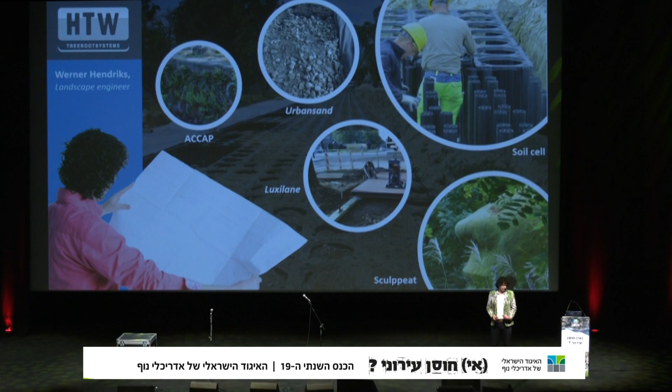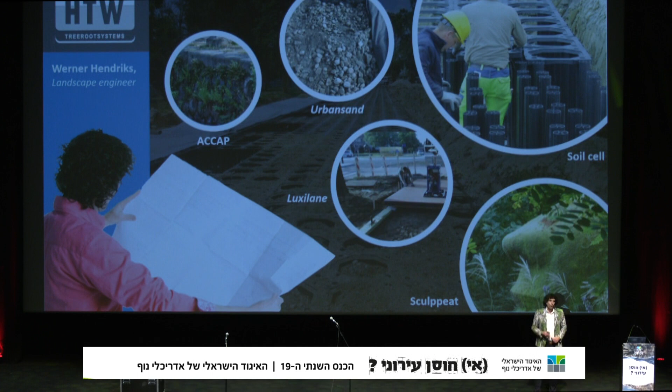First of all, for the people who don't know me, I'm Werner Hendriks from the Netherlands, and I was a former landscape architect, but I was ashamed of our profession. We made beautiful drawings with really big trees, and after 10 years, those trees were not growing, dying off. So as landscape architects, and I think there are lots of landscape architects here, we should be the ones who are responsible that the contractor is doing a good job, and planting big trees means you need lots of soil underneath the tree.

So I went back to the university and studied tree engineering, green engineering, only underneath the soil. So I'm not an expert in trees, I'm an expert in soil conditions. These are some of the products that in the meantime I developed: urban granulate structural soil, Luxilane, a floating bicycle lane, because in Holland we have lots of bicycle lanes. We have several soil cell systems, also here in the exhibition, so take a look at that.

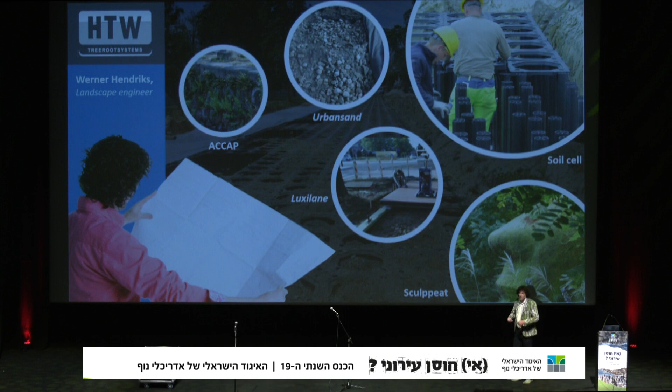But also, for the quay walls in Amsterdam, we are growing spontaneous plants on newly made walls. And it's exactly the same as we do for trees. It's all about how we can grow roots everywhere. So also on new walls we can grow plants. So my profession is much more than only trees. Okay, this is the presentation. We already had some issues about climate change, and we know climate change is coming, so I'll go through the next steps quite fast, because the time is limited, I heard.

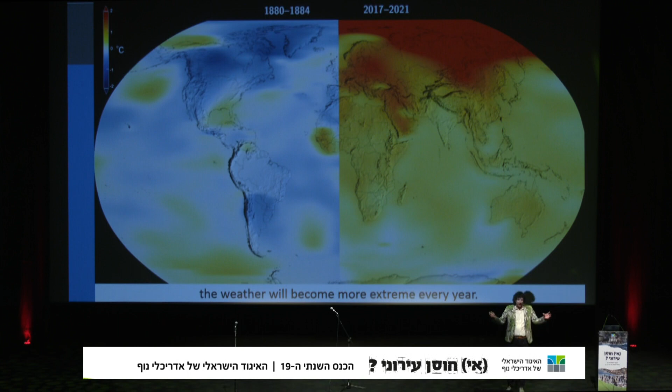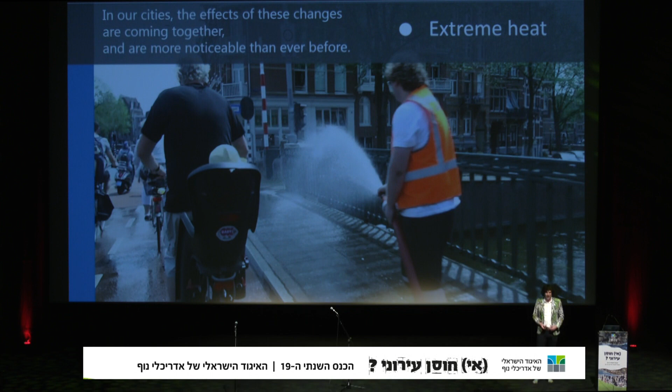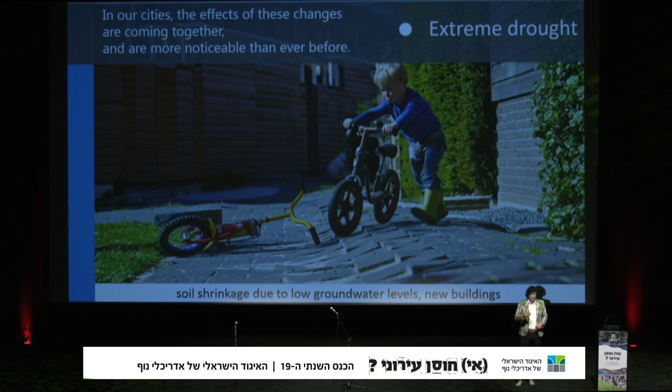Also flooding, of course, and soil shrinkage. You maybe don't have this problem, but in our country, the sea level is rising and the soil is sinking, so within several decades, we have a much bigger problem. So climate change is really affecting every one of us, not only us in Holland, but also you everywhere. What I show you in red are the things about climate change and about trees. So we have to look at how we can incorporate better solutions for the cities.

And of course, my field of work is normally Europe. But the things that happen in Europe, the physics of tree planting and stormwater management, are exactly the same in Israel as in Holland. Only the conditions are a little bit different.

So I want to tell you about the next generation of solution. The last time I was here, I was talking about tree planting solutions, only one function. But now we need to go further, one step ahead. So last time I spoke about grey concrete, that we should have more trees. And in Israel, it's probably even better that we have more trees because we need more shade.

But all the design is made because we need cars in the city. In Holland, we call the car the king of the city. But the king of the city should be us, people. Drainage. In Holland, we are really, really good in draining water away, directly to the sea. And because of that, we now have major problems. So we have to find a way to let the water infiltrate inside the city. And that's probably exactly the same that you have.

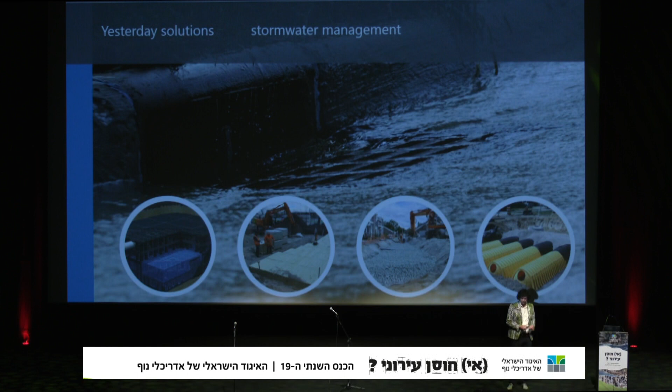The rain gardens or swales, I saw it already in some presentations here. It's a depression in the area where you can capture water. Of course, this is very nice if you have a new surrounding, a new village that you're building. But in the old city, there is no place for such a big open area. So we need some other stuff. So we have the infiltration crates, the second picture. It's just plastic or concrete or steel structures underneath where you can store water directly. But it's only one function, storing water.

We have gravel, just rocks that have similar sizes, so there are lots of pores between the rocks, so you can store water. It's a cheaper way, but of course in the crates you can have about 95% of water, and in the rock you can only have 30% of water. So you need much more room, and again, in an old city you don't have so much room. There are utilities everywhere, so we need to work around.

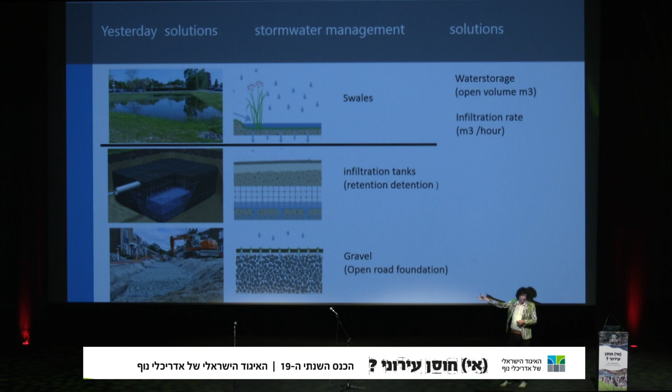All those solutions have one problem. If we let runoff water get in, pollution is floating with the runoff water. So leaves, oil leaks, salt, everything is flushing with the water into those systems and directly into our environment. So there are solutions for that. We have catch basins to filter out the hard sand materials, the leaves. We have big sand filters to get the fine particles out, or carbon filters to filter the oil out of the water, so it won't get inside our groundwater reservoir anymore.

And these are some of the things I want to talk about. And we do the same for tree planting solutions. Stormwater management is instantly measurable. We can measure how many cubic meters of crates are in, so we know how much water we can store directly after one rain event. There is policy available for stormwater management and also much experience. These crates have been on the market for 20 years or longer, so we have lots of experience and research on that.

And we also know the obligations; there are laws about how much water we should store when we make a new village. For every square meter, in Holland we calculate with 100 millimeters for every rain event. So there's lots of water we need to store. So the budgets are available, and this is a really good thing. Budgets are there for stormwater management. The maintenance cost, that's the second thing. That's not an advantage, it's a disadvantage, because with stormwater management, you need some maintenance.

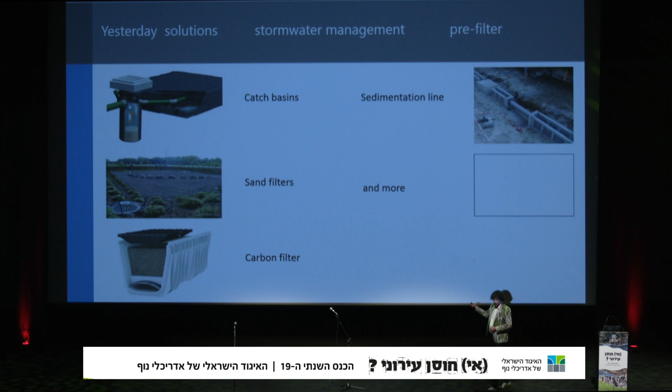Can we go back? Yes. These filters should be cleaned after a while, and this is costing us money. If we don't clean, we cannot store so much water anymore. So this is costing us money. Oh, that's too far.

And the non-visibility of maintenance, because everything is underneath the soil, underneath the pavement. Nobody can see if the contractor maintained the crates. Did he clean up? Nobody knows. And contractors, you know about contractors, it's hard to supervise them, make them aware of what they should do. And of course, we always need anti-pollution filters. So it's not only stormwater management, we also need the sand filters, the oil filters, to prevent pollution entering our groundwater.

Now we go to the tree solutions. And this is, of course, in my field of work.

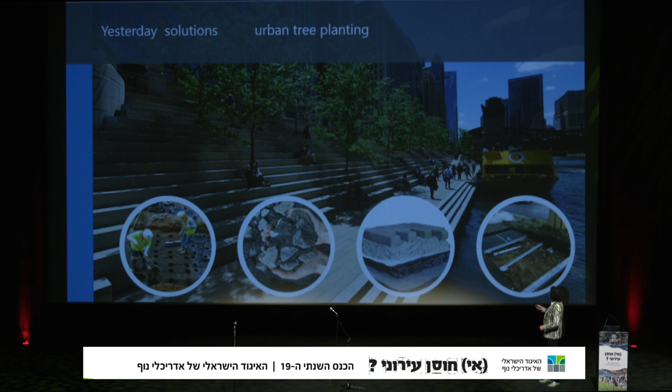Let's start with this one, structural soil. Now, after 6 years, I see several products already implemented in Jerusalem, in Tel Aviv, all around Israel. Structural soil, for the ones who don't know what structural soil is, it's similar to the rock for stormwater management. Rocks of the same size, but now in between those pores, there is some soil. And in this soil, the roots can grow. So structural soil is nothing more than a foundation for the road where roots can penetrate.

But remember, and you see it on the soil efficiency, 20%, so if you install 10 cubic meters, only 2 cubic meters of soil are available for the tree. 80% is just rock. It's not doing anything for this tree.

Now we have raft systems, sandwich constructions. They are made because in Holland we have sandy structural soil. And sandy structural soil is not equipped to have truckloads. So the raft systems are like big snow boots underneath the wheels of the truck, so the pressure on top of the soil is not that much. And the air layer, they are open crates, so air can come in, so there's more biology inside the soil. And that is, of course, better for the trees.

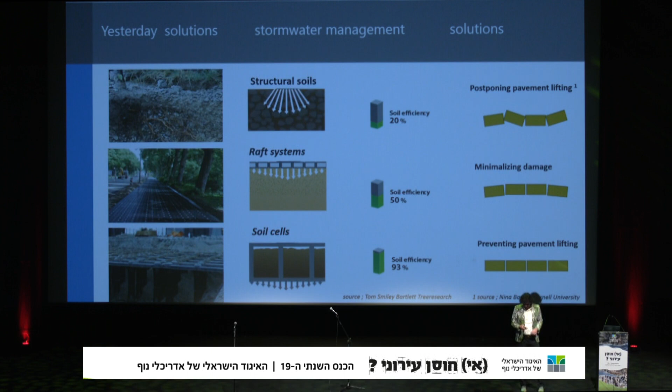And of course, when we have trees in Holland, you think, okay, in Holland, we get rain every 2 weeks. We don't have to water it. Of course, we don't have irrigation systems for every tree. But we need water bags to water the trees in the first 2 or 3 years, so they grow and get the roots out, and then they can survive. And we have different systems. And here in Israel, we use, of course, more like dripping systems or bubblers.

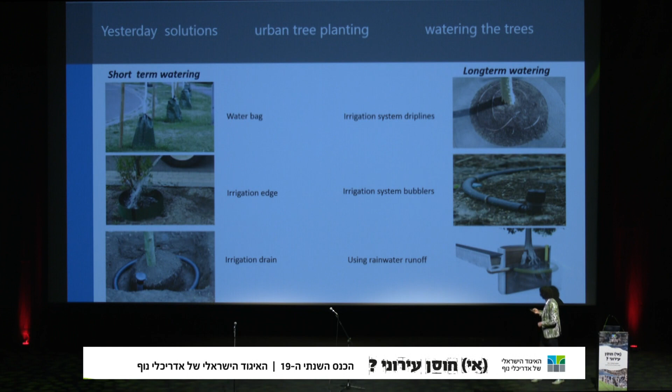And below, this is a system that we now use in Holland more and more. So rainwater is captured and just flushes into the root system. So we don't water the tree, the rain is watering the tree, because when the tree is covered with pavement, somehow the water should come in. And in this way, water can come to the trees.

And we can have systems like soil cells, structural soil, sandwich construction, but it's all about the soil. The soil is the most important thing to grow trees. And in one of the lectures before, soil is one of the biggest stormwater management systems that we have. We can store lots of water inside soil. And with a tree planting system, we have soil inside, so we can also store water inside.

But compacted soil is compacted, so the openings are pushed out by compression. And in uncompacted soil, there's much more air and water volume, so we can store more water. So it's very important that if we plant trees, the soil should be uncompacted, because then we can store more water and grow better trees.

And not only the compaction rate is important for stormwater management with trees, also the clay content and the sand content. Because you see here, in sandy soil you can store about 30% water. In clay soil, you can store mostly about 50, 60% of water. But against that, in sandy soil, you have a much higher infiltration rate. And with clay, water will not infiltrate, so it takes much longer before infiltrating.

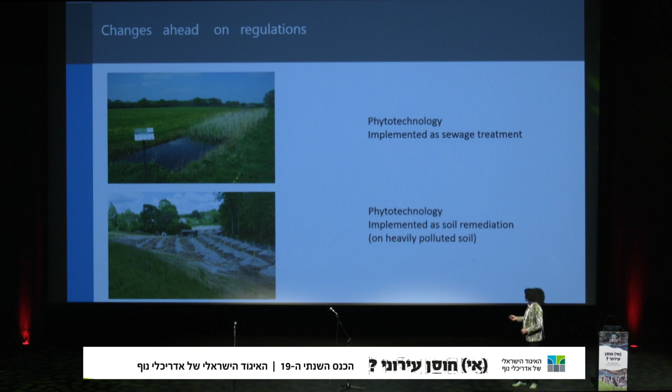Phytoremediation, in short, I don't know how much time I have. Okay, we have to hurry up, I think.

These are some of the strategies that trees have. And those strategies, we know they are working. We have research on phytoremediation and phytotechnology, but we are not implementing it with urban trees. Why? Nobody can tell me why. We know it is working, but we do not use it with trees in our cities. These trees can also have the same function as over here. So for that, we have to be open for change and open for research that has already been done in other countries, maybe also in this country, and adapt that to our city trees.

In swales, we already do it, but for another reason. In swales, we can have water inside, and we know some dust will come up and just clog the surface area. We know now, if we plant trees with it, this won't be clogged anymore. So this tree is making the soil like a sponge again.

But because this tree has this function of opening the soil again, we also do research on how much pollution it can get out. And this research we can use for our urban trees, because again, we don't have so much area in old cities to make systems like this.

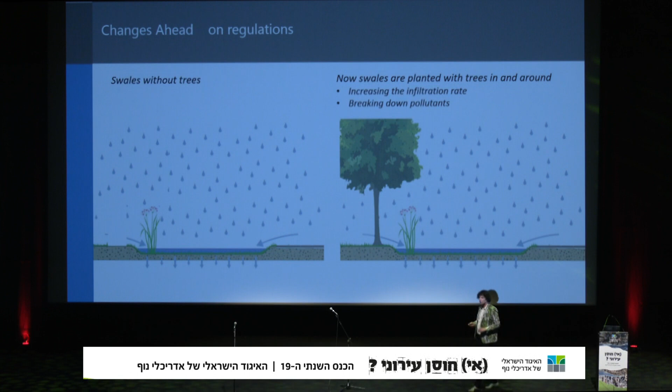And now we are going to compare the pros and cons from the stormwater management and the tree planting systems. And now you'll see something nice. When we do the next, reduce all the cons. Against every con: no regulations, there are regulations on stormwater. Low budgets, very high budgets. High maintenance cost, hardly any maintenance cost.

Non-visibility, visible. If the tree is growing, the system is working. Anti-pollution filters, extra cost. We don't need that. We have trees that will do the job. So if we can just combine those pros and leave out the cons, we can have the next step of new systems, and then we can save some money.

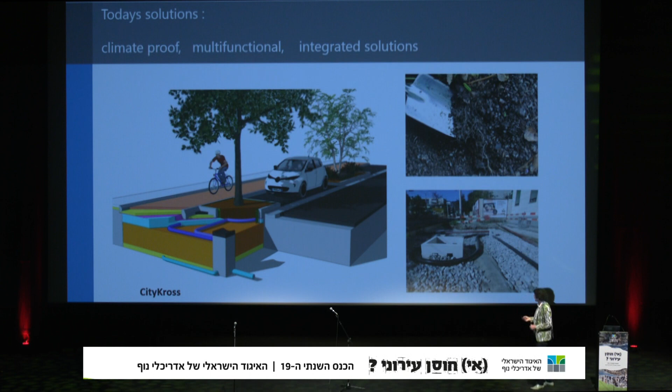And because there's lots of carbon inside structural soil, these can pick up the pollution, and only clean water can go out. So we have a Stockholm method that is good for trees, good for stormwater management, and good for filtering. But it still is structural soil. You need lots of volume, because if it's only 20% of soil inside, in this soil you can only have 30% of water, then you need lots of volume to have lots of water inside. But it's working.

The next, the sandwich construction, raft systems. It's an open area underneath the pavement for spreading the loads. But because it's open, we can also let water get in. So this line is connected to the sandwich construction, which is on top of sandy structural soil. So in this case, we can give the system an extra function.

And it is also Wageningen University in Holland who says, if we design something new in the cities, we must get rid of the one-functional applications. Every new design, every new subject in this design should have at least 3 functionalities. And this has 3 functionalities. First of all, the water inside can infiltrate in the soil. The oxygen can get in for the trees, so the soil has more oxygen. And the pavement will spread the loads, so we can have heavier trucks driving close to the trees.

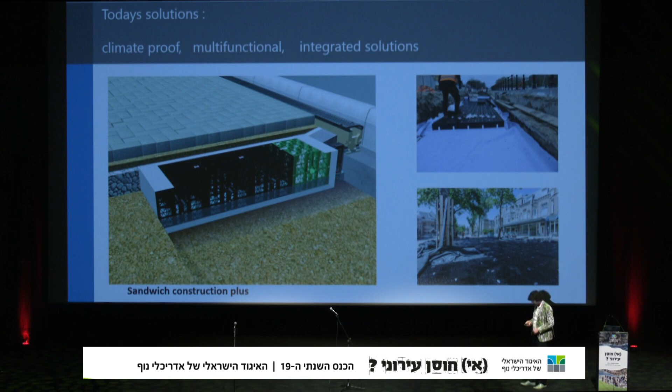Then we have the sandwich plus system with a second water table. So we can see there is a sandwich construction on top and one below. So water will infiltrate first here, go down, and here it's being captured. In Holland, we don't have any irrigation systems, and the droughts are getting longer also in Holland. When we have rain, we have to capture the water, and we can capture it inside a low system underneath. And with capillarity, the water is available for the trees in drier periods. So this tree can survive many droughts.

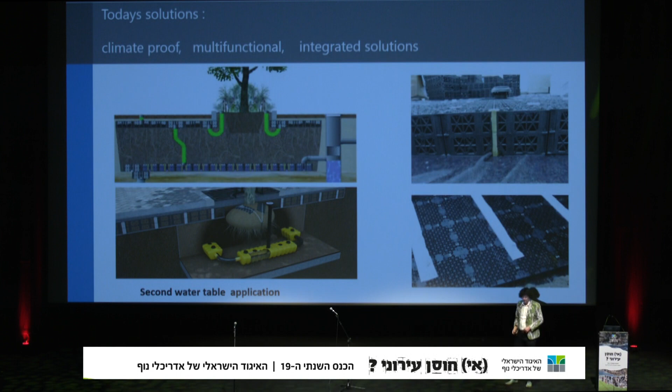Then we go to a special system. In Holland we use lots of insulation for the winter period, for houses. And this is rock wool, just normal basalt that is made into rock wool. But this rock wool is made differently. This rock wool can hold water, so 95% of water can go in. And because of the small pores inside, water is also available by capillarity for the tree. So in this case, you can store 95% of water underneath and still have the water available for the tree.

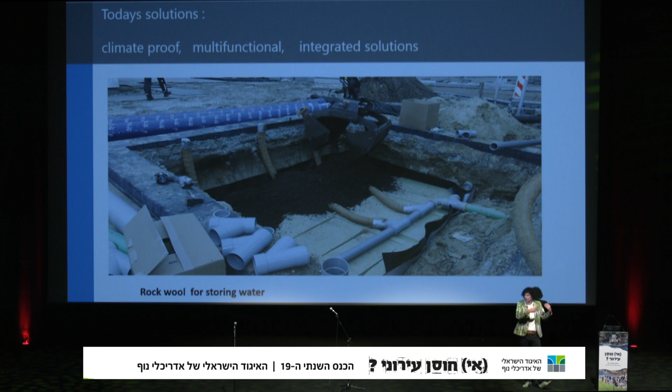This solution, I'm not quite fond of it. I think the roots will grow directly inside when it's drier, but let's see. We must try. We must be pragmatic. Just try and see what's happening, make it, open it again and see if it's good or not. If it's bad, just get rid of it and try something else.

And let's go a few slides back. We talked about phytoremediation. We talked about the rain gardens with the tree. But how can we make this a better solution and maybe the best solution for now?

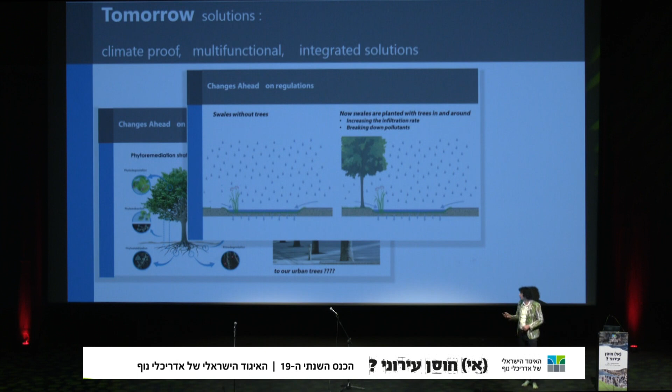And this is quite easy. Now you have a stormwater management system and trees. We know we need to plant more trees in the cities. We know we need to have more water capturing for the rain events. And with this system, we can do both. We already have the money for the stormwater department. The tree department doesn't have so much money. Now we have to combine.

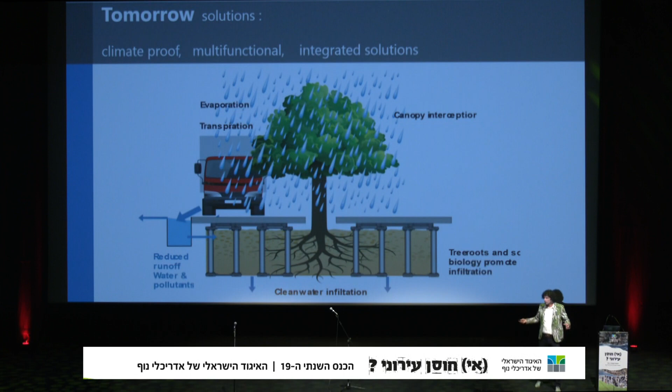And as long as this tree is growing, this tree will just maintain the soil, take up the pollution, break it down, or capture it in the root system. And this tree is maintaining everything. So with this system, two systems combined, we don't have any maintenance cost, only pruning the tree. And then we're saving money by just putting two systems together. That easy.

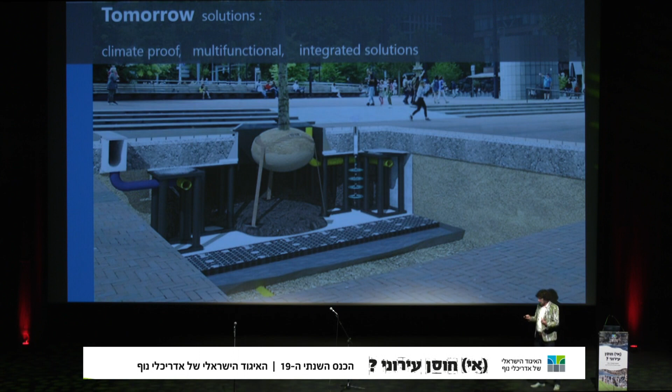And what does that look like? This is one of the systems installed in Rotterdam. These are the systems, the tree, and in this case there's also storage underneath. But let me see if we can do this also in Israel. There are two systems. The ones who look closely already saw it. The picture before was with stormwater management underneath and the soil cells, and the other one was water directly infiltrating

in the subsoil. These systems, in Holland, we use when the groundwater level is quite near the surface. Because why should you capture water if the tree can just get groundwater? So we don't have to capture water. But in Holland, we also have areas where the groundwater level is 17 meters deep. So then we need some extra storage, and then we can use this one. But maybe this one is also good for Israel.

You can have lots of water inside. It will be filtered. The extra water flushes through because the rain events in Israel are mostly in the periods that the trees are not growing that much. So most of the water is just flushing in and going down. And then when the tree needs it, it can just take up the water again. You don't have to irrigate so much.

And yes, I get the question: in the wintertime when the tree is not growing, does the phytoremediation still work? Yes. Also, there are investigations in America where in the wintertime, when polluted stormwater is entering the system, the system is working. So the tree doesn't have to be growing. The soil biology should be there. Carbon, like humus, should be there. Then the system is working, also in the periods that the trees are dormant.

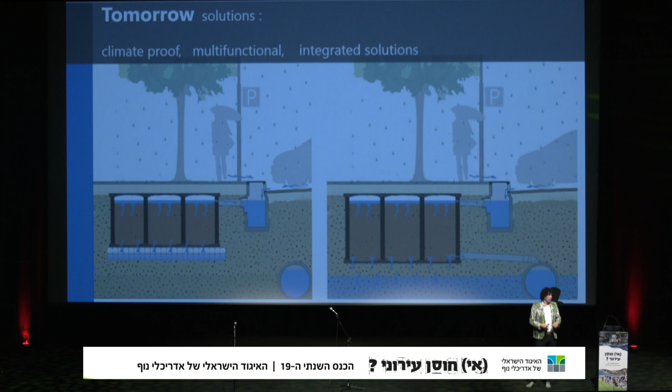So now the benefits: we don't have any clogging anymore. The filter is always operational. We don't have to clean the filter. The tree is doing that for us. And it's economically interesting. No maintenance, multifunctional use, and a better performance every year.

Because if the tree is growing, it can capture more water, it can take up more water, it can filter more water. So this system is growing with the climate change. Because the rain events are going to be bigger. And as long as the tree is growing, the system is growing. And this is maybe the best system, I think, for now that we can implement, and saving money.

So I hope some of you will step up, because I really believe one person, again, can do the job in the city, just by standing up, talking about the trees, talking about how to bring other departments together. Now we're talking about the stormwater department, the green department. We have to talk together and make one solution. Then we can save money. So I hope when I come back the next time, these systems are also being implemented.